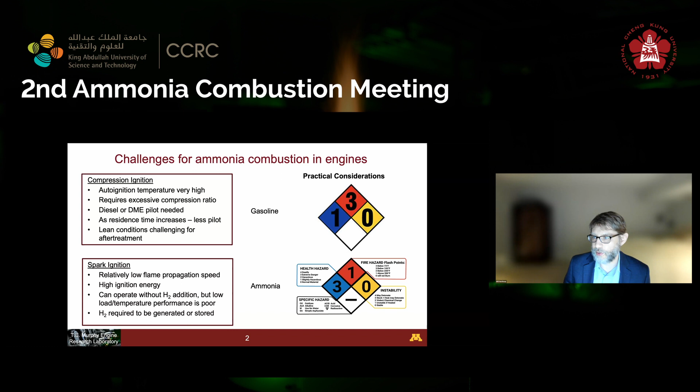Obviously, locomotive in the US is important as we use engine-powered locomotives primarily. And marine is the big sector right now, especially a lot of interest in Asia. And in my state where I'm from, in Minnesota, agriculture is where we have the most applications.

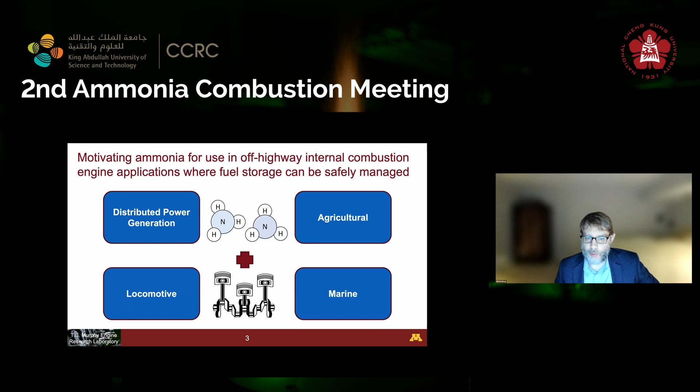Thermal DeNOx is a known kinetic pathway for reducing NOx emissions, and that's something that I'm going to discuss. We see it often in engine cylinders at combustion relevant timescales. So I think that's an interesting phenomenon. Unburned ammonia is a huge challenge, and ammonia slip through engines.

Incomplete combustion and low flame speed account for part of this, but really wall quenching and crevice volume effects are huge with ammonia. So this is something that needs to be considered, and looking at unburned ammonia is a major factor, considering the health hazards that I've already alluded to, and our ability to use lean aftertreatment to clean up any ammonia slip, as has been mentioned at the very end of the last talk.

N2O is a key byproduct of ammonia emissions that needs to be accounted for. It's a 300 times CO2 greenhouse gas. It means that any amount of N2O emitted over 20 ppm is considerable. It means that you might as well be using a hydrocarbon fuel as part of your fuel mix from a greenhouse gas perspective. So it's really important that we understand N2O and how it can be managed.

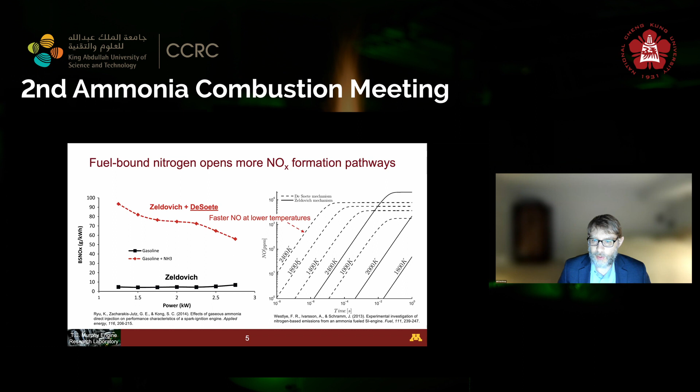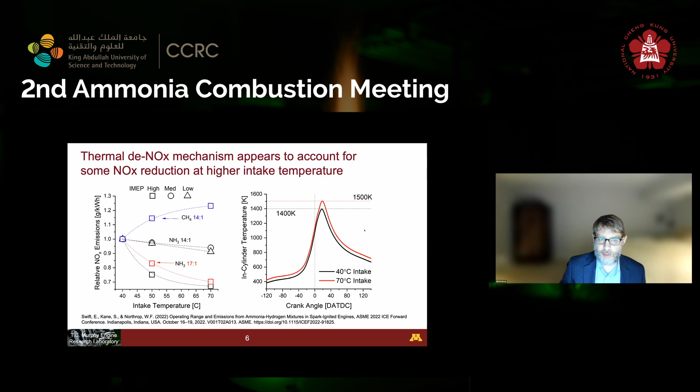One of the things that's a cautionary tale, however, about the thermal deNOx mechanism is that generally there's an equilibrium to be had with NO and N2O. So if you have thermal deNOx, you could make N2O as a byproduct. You can't have the NO reduction necessarily without in some way creating more N2O in the process, depending. So there's a low temperature equilibrium reaction that's possible during the high oxygen pathway. So this would be for lean combustion, where you see that the low temperature chemistry dominates and the equilibrium dominates, and you end up getting N2O as a result of this.

And then of course at high temperatures and fuel rich, then you get combustion. You end up getting equilibrium towards N2O, even though you're reducing NO at the same time. So certainly there's probably a sweet spot in here where you have the right amount of oxygen in the combustion chamber, and you can manage the thermal deNOx process such that you reduce both of these. But I certainly think this is a major challenge going forward, that both NOx and nitrous are key components of what needs to happen in an engine cylinder.

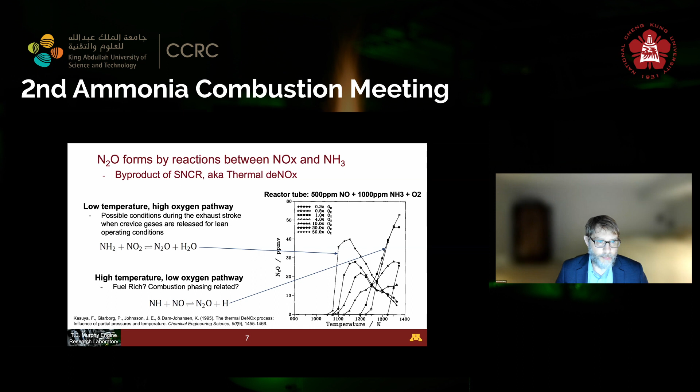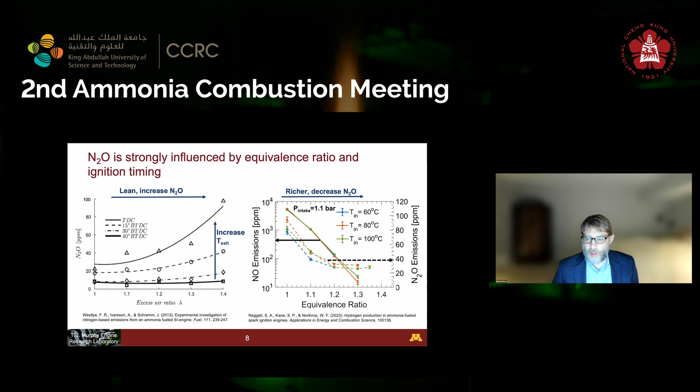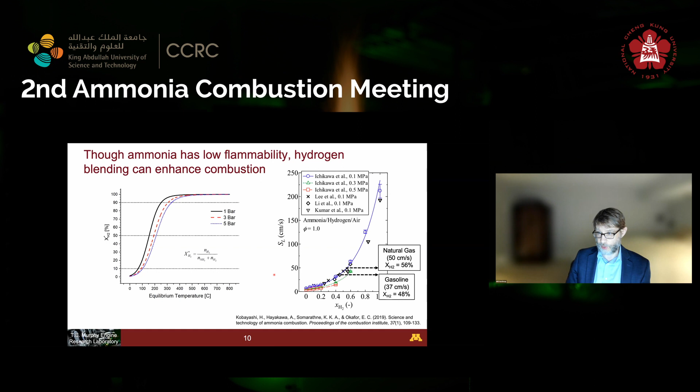I know this is more about combustion. Here we're looking at some of the laminar flame speed information that we understand for ammonia. I think this has already been pretty well covered, so I'm not going to go too far into it. But needless to say, we know that in order to meet the blending requirements from a laminar flame speed perspective, you need to have hydrogen percentages in the 40s to 50s range.

However, as we've already discussed, Hong Im's talk did a really nice job of talking about the thermal diffusive effects of the speed up from laminar to turbulent flame speed for ammonia flames. This is some work from Jackie Chen's group at Sandia National Laboratories, and some of her work from a few years ago showed that although you require about a 40% to 45% hydrogen blend to match laminar flame speed over a range of equivalence ratio, the blow off speed is shown to be about 10 times higher through their DNS simulations.

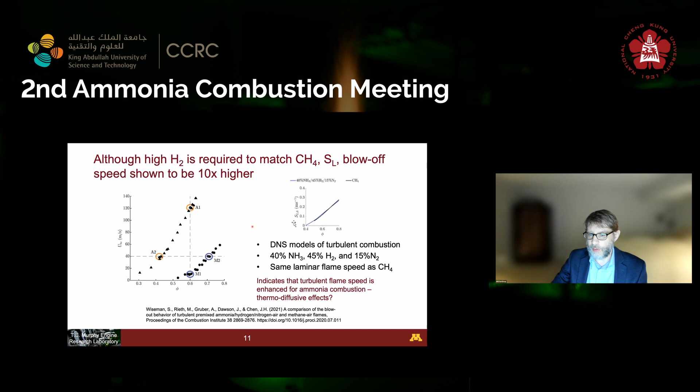So their models show some of the same things that have been shown more recently with regards to speed up for ammonia hydrogen flames compared to what you would expect from the laminar flame speed. This is really promising because essentially it shows that we may need less hydrogen as we go forward in terms of blending.

Okay, so moving on, I'm just going to talk briefly about some of the work that has been done in dual fuel. For medium duty engines, the discussion, of course, is around dual fuel for diesel. For diesel, we're talking about a decomposition catalyst that we've used as thermochemical recuperation to understand how we can generate hydrogen on board to replace diesel at a higher level, and still maintain really low ammonia slip.

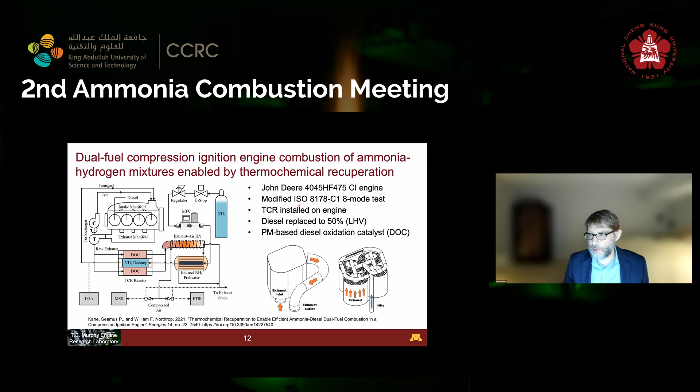In this case, a John Deere 4045 engine was used. It was a 4-cylinder compression ignition engine over a multi-mode test. We've developed a thermochemical recuperation reactor that is able to convert some of the ammonia to hydrogen, which is then used to increase the reactivity of the fumigated ammonia fuel. Over a range of ammonia energy fraction, we can keep N2O emissions relatively far down, although they are elevated in the 1 to 200 ppm range, which is not really acceptable.

If we look at the ammonia slip as well, we see a considerable amount of ammonia slip, but compared to earlier work that uses just ammonia and diesel together, we get a lot less slip. So we have a little more advantage when you blend hydrogen in with the mixture. I think this is a promising idea, to increase the reactivity of ammonia even for the dual fuel combustion cases.

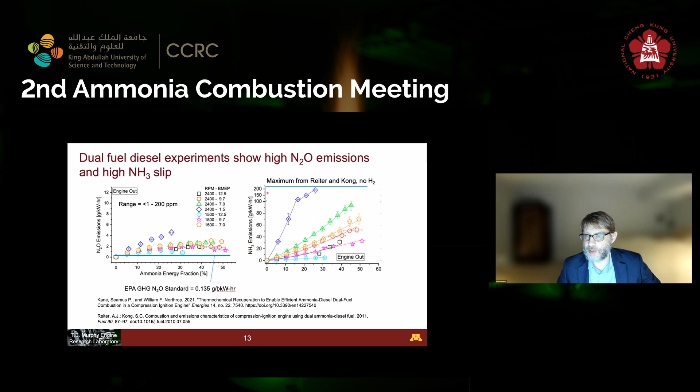All right, checking the time here.

Okay, so essentially, I'll just throw some questions here. In a lot of cases ammonia is being discussed for diesel applications, because that's where the incumbent technologies are in marine. However, I think that we need to be looking more at spark ignition type approaches, mainly because of some of the issues I discussed around N2O and around the use of dual fuel.

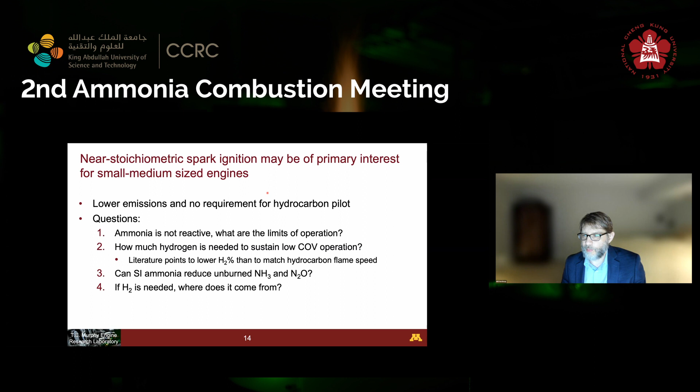If we go to a spark ignition concept, ammonia can be used directly. However, it's not as reactive. So what are the limits of operation? How much hydrogen is needed to sustain low COV operation? Can SI ammonia reduce unburned ammonia and N2O emissions? And of course, if hydrogen is needed, where does it come from? Some of the work that we've done includes use of a CFR engine. The CFR engine is a low-speed engine that's quite quiescent.

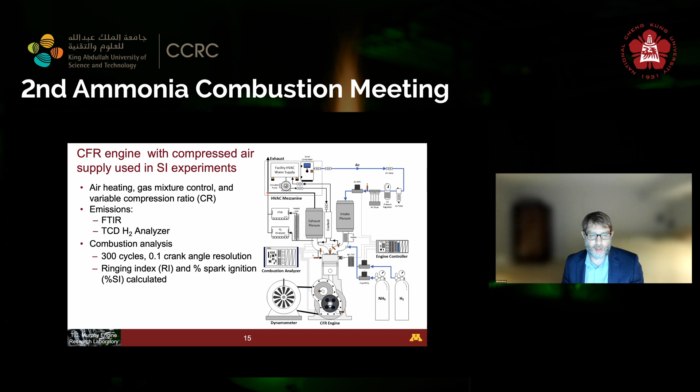However, it's really good for understanding auto ignition and fuel properties. So we've done a lot of work with emissions analyzers and in-cylinder combustion analysis with this platform. High compression ratio spark ignition: essentially we are running the engine close to 18:1 and in some cases higher.

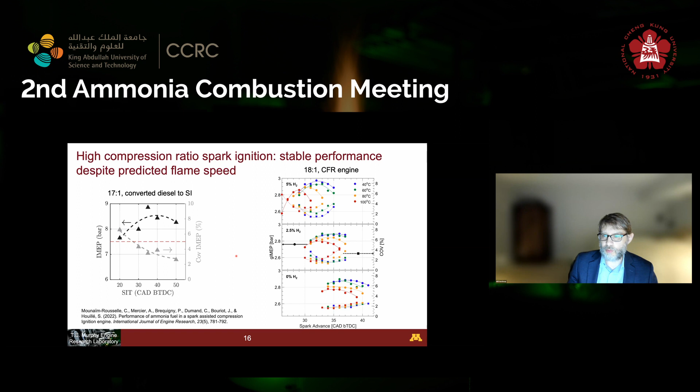However, if you go to higher hydrogen amounts, you can obviously get higher efficiency, and you can improve combustion quite a bit with even small blends of hydrogen. So 2.5% or 5% by volume hydrogen is really appropriate. So you might ask, and one thing that we've asked is, even if there is some sort of turbulent flame speed increase, why is it okay to run ammonia at engine relevant timescales without very much hydrogen blending?

One of the things that we found that leads to this story is that ammonia doesn't knock. If you're thinking about ammonia as a fuel for SI engines, we can't get it to knock at all. If we advance spark timing very far, we don't see that ammonia's ringing index goes up anywhere near what we get for, say, methane, which is shown in the blue. Methane will, of course, immediately knock and have high ringing very quickly. We don't see this with ammonia at all. So we can run up to high compression ratios. In fact, we run a 20:1 compression ratio and still don't see any significant knock.

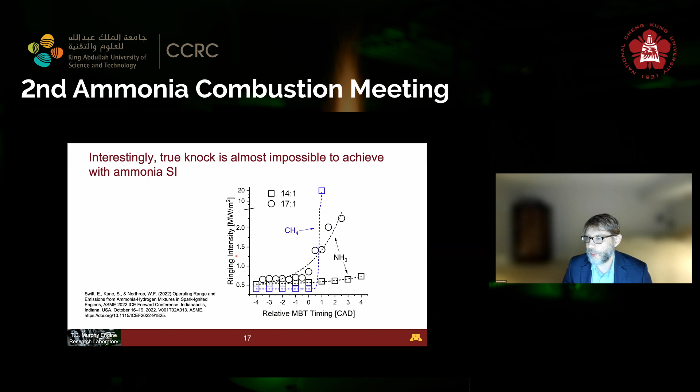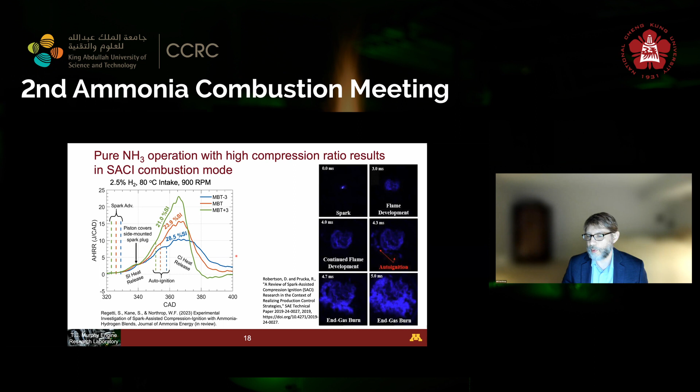One of the things that I think is happening, and something that we're recently publishing, is that pure ammonia operation with high compression ratio results in what's conventionally known as spark assisted compression ignition, or SACI. We're finding throughout most of the heat releases that we've been analyzing, and this has also been shown by Rousselle and others, that there is this two-stage type combustion happening with ammonia, especially with small amounts of hydrogen. And this, on top of the turbulent flame speedups that we're seeing, may account for the short combustion durations, enabling low hydrogen amounts to be run in spark ignition concepts, which is quite promising.

Okay, looks like I have about 5 more minutes here.

So I'm going to talk a little bit about the potential sources of hydrogen for high efficiency operation. If we do need to have some hydrogen available, and we don't need much, 2.5% to 5% by volume hydrogen in the fuel blend, we can consider a few different options. We can consider onboard hydrogen storage, which is impractical, catalytic ammonia decomposition in the intake, or dedicated EGR, which is another concept that we've been exploring here, and has been explored by others in the gasoline and natural gas engine world, as discussed by Alger et al. and others at Southwest Research.

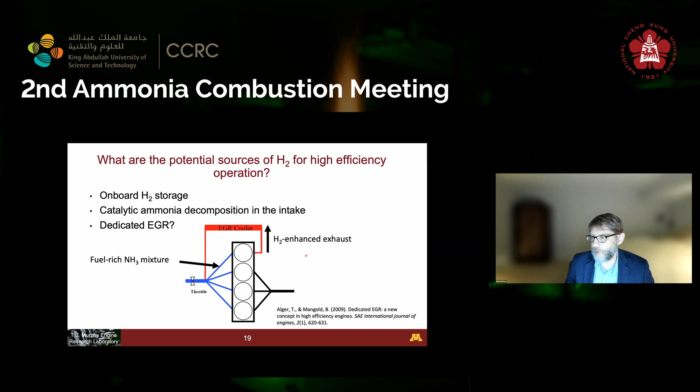In this case, you can run one engine cylinder rich while the others are running lean, and use the products of that rich cylinder to feed the other cylinders and provide hydrogen at the small amounts that are required. To investigate this concept, we looked at a range of equivalence ratios up to 1.4 inside the engine, and found that as you run this equivalence ratio up, you can achieve pretty stable combustion, and this is all pure ammonia going into the engine.

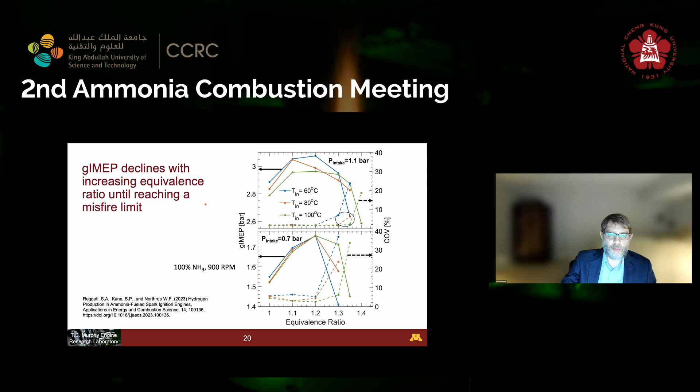Depending on the intake temperature and intake pressure, with boosted conditions, you can get up to about 6% hydrogen, which I'll show in the next slide, but we can keep the engine fairly stable up to an equivalence ratio of about 1.35, or almost 1.4, before the engine quits. So this is promising and can be an option for practical generation of hydrogen. Hydrogen production increases until the misfire limit, peaking at around 6%. So we can see that 6% hydrogen is essentially feasible.

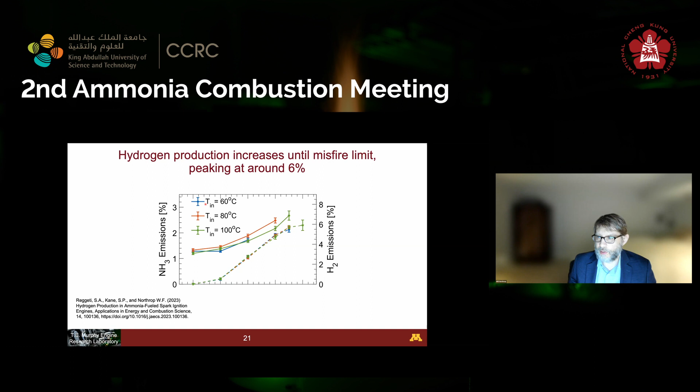Of course, the unburned ammonia emissions are quite high, up to a couple percent. But if that's being fed back into another cylinder, that shouldn't really be an issue from an emission standpoint. So that's one possible way that hydrogen could be made. Of course, another way is to be using the catalytic decomposition technology that's been developed, and some of the cracking technology that is available to use exhaust waste heat to decompose ammonia to hydrogen-ammonia mixtures.

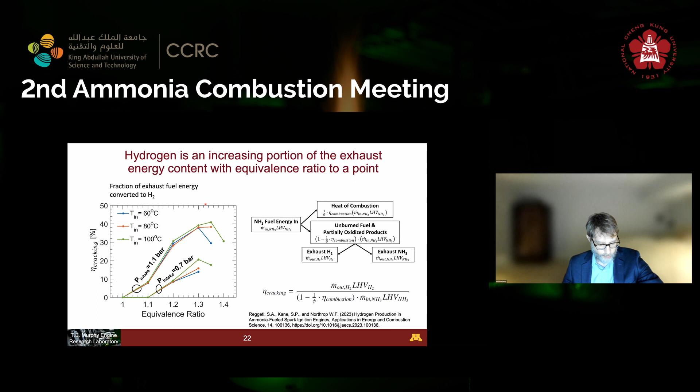This is just some final thoughts on hydrogen as an increasing portion of the exhaust. So this is some more of that work, but I may leave that off and move to my final summary. Essentially, looking at engine combustion, I think most would agree that ammonia is operable and viable as a fuel for internal combustion engines. I think compression ignition ammonia in high and medium speed engines requires a pretty considerable diesel substitution, and will have N2O emissions challenges that I think need to be addressed and understood.

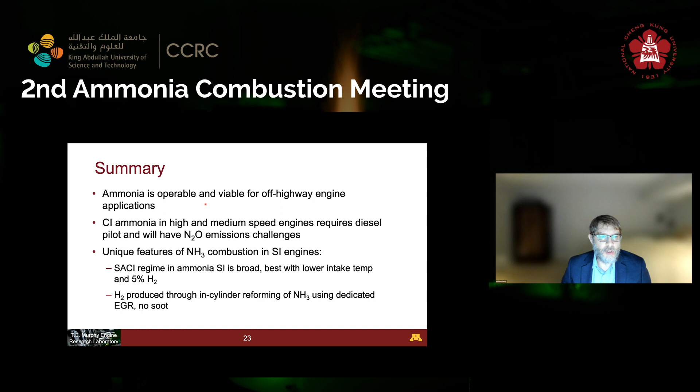Unique features of ammonia combustion in SI engines include the spark-assisted compression ignition concept that I've discussed, that has been seen in our group and others. Looking at decreasing combustion durations using that technique is promising. Hydrogen produced through in-cylinder reforming of ammonia is promising as well, and you could also consider using catalytic decomposition processes as well. And with that, I think I'll complete my talk, and we can start a discussion. Do you have any questions?

Thank you, Professor Northrop, for that great talk. Very interesting, covering a lot of areas in internal combustion engines. Okay, the talk is open for any questions from the audience. Got some microphones here to pass around. Okay. Yeah, thanks very much.

Nice presentation. Just wondering about the cold start problems. Is that an issue for your engines, and how do you go about fixing that? Yeah, that certainly is an issue. We've been mostly running with single cylinder engines ourselves. On the diesel that I'm showing here with this tractor, we did a field demo. That was started on pure diesel, and then once the engine was warm, we moved to ammonia substitution. What we expect for SI-type combustion under cold start conditions is that you'll require hydrogen or pretty considerable intake heating. So those are both options that I think need to be looked at.

Does this mean you have to have cracking or another tank that you have to provide? It's a good question. Yeah, there are a couple options. One, you could have a small startup hydrogen tank, which is obviously not that attractive. Another option is to have a small ammonia decomposition reactor that's fired electrically, just to provide just enough. As I said, we don't need much hydrogen. We need a couple percent in the fuel. So yeah, it's a possibility. I know that companies like Amogy have come up with small-scale startup reactors that will provide some hydrogen within seconds. So something like that might need to be employed. Okay, thanks.

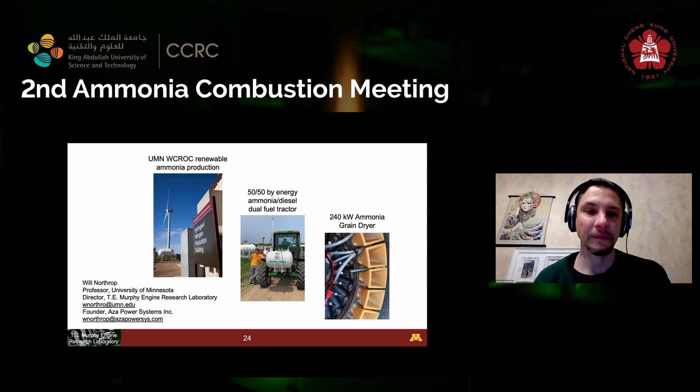One of the things I'm curious about is not necessarily metallic interactions, but more on the lube oil side. I think the lube oil formulation is something that nobody's thinking about right now, or maybe some people are, but it's certainly going to be a factor. So new lube oil formulations are going to be required. Additive packages are going to be very different. And ammonia loves water, of course. So anything that involves the interaction with water and the lube oil is going to be really key. We're going to start looking at lube oil effects this summer, actually. But yeah, I haven't seen anything yet, Augustine, but I'm sure as more engines are run longer, we're going to see some more effects.